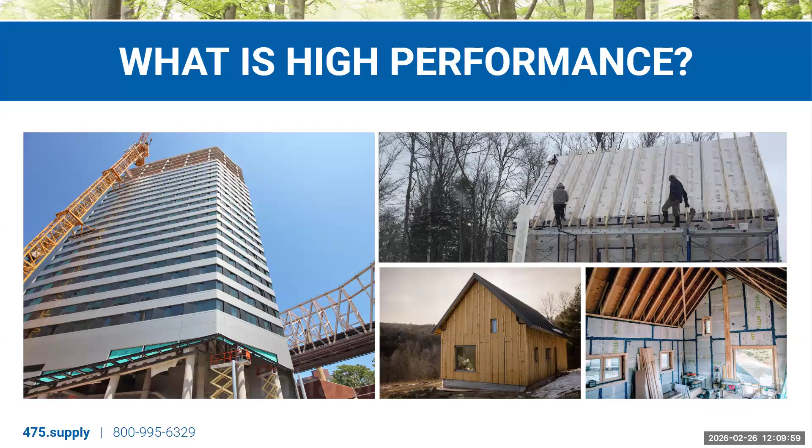The one that is probably most commonly associated is energy efficiency. When we optimize the enclosure, we minimize heat transfer. And when we minimize heat transfer, we can reduce our heating and cooling demand significantly and thereby reduce the carbon footprint of our buildings.

What also comes along with a high performance building and enclosure is excellent or exceptional comfort. When we have continuous insulation and airtightness, we reduce drafts, we reduce cold spots, and for that reason these buildings are consistently heated and very comfortable.

In addition, these buildings are very healthy, particularly because they're airtight and they don't allow airflow through the enclosure, so any air they bring in can be carefully filtered.

In addition, high performance buildings we expect to have continuous heat recovery ventilation, and so they're constantly exhausting stale air. So very high indoor air quality and generally supporting good health.

These buildings are very resilient in that they excellently manage air, water, vapor, and thermal control. They provide excellent protection for the structure and the control layers, and so there's less need to maintain or repair those elements over time.

This one may be a little controversial: affordable. We like to think that high performance buildings can be affordable, particularly airtightness, which is the most effective way to reduce heating demands in the buildings that we design. It can be implemented in most projects for a relatively low additional cost.

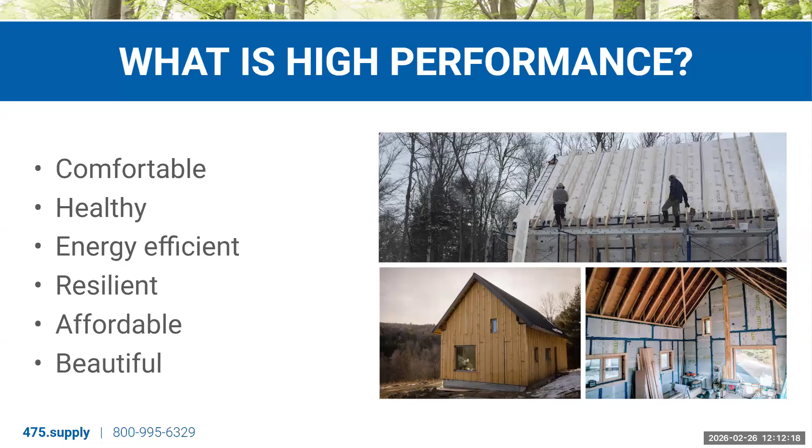So first, looking at the robust enclosure, again, this is somewhat fundamental, so just bear with me as I build the foundation, and then from there we can look at some more specific and interesting concepts. But first, talking about the robust enclosure.

So we talk about a robust enclosure, we talk about an enclosure that mitigates heat transfer, heat gains, and heat losses. We want to reach a point in our building where our energy is balanced, meaning that our total heat gains are roughly equal to our total heat losses.

Generally speaking, in most climates, particularly in Connecticut and where I am in New York, our total heat losses in the winter are going to exceed our total heat gains, and that's why we have mechanically generated heat to supplement our heat gains, which otherwise come from the sun or from internal gains, such as our body heat or machinery, computers, electronics in our buildings. But generally we're trying to reach this point where total heat gains equals total heat losses.

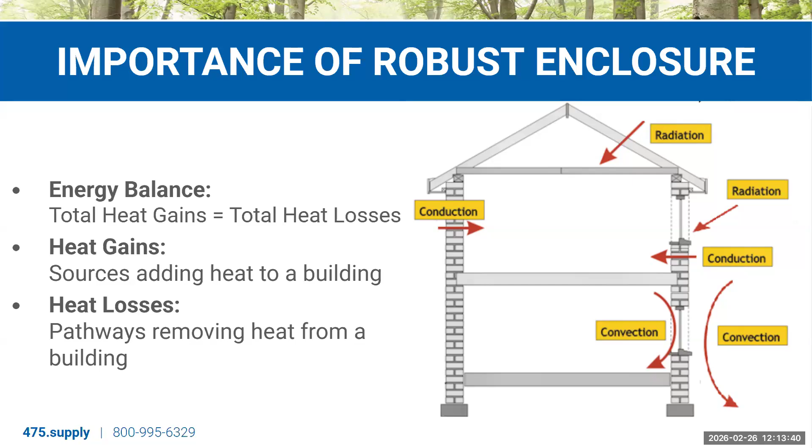And if we're mitigating heat gains and heat losses by creating excellent airtightness and insulation in our enclosure, then that becomes much easier. So what does a robust enclosure look like?

We at 475 like to reference Joe Lstiburek's perfect wall, which you guys might be familiar with, shown here on the left - a conceptual diagram of what every element of our enclosure should provide, shown as a wall on the left, and then on the right shown as a slab or a roof.

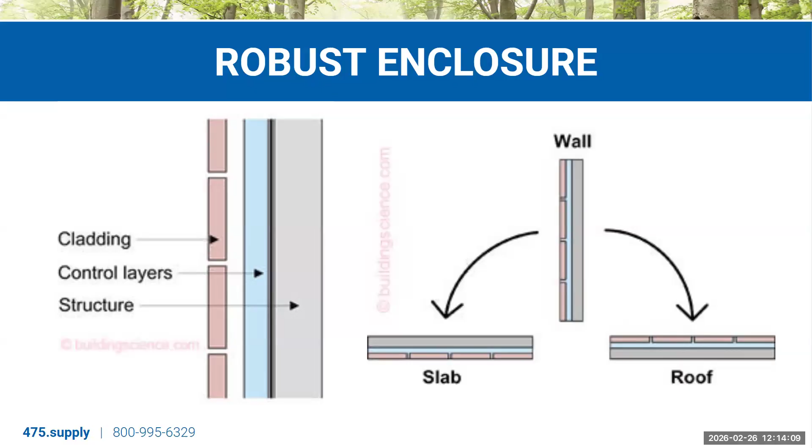Essentially, the three main categories of the perfect wall are the exterior cladding, the interior structure, and also the control layers. Looking a little closer at those control layers, we can break them into four categories in order of importance. First, water control - the most important because if our buildings can't hold water, they're not doing their most fundamental job, and they really aren't going to be inhabitable or usable, particularly in the long term.

Secondly, we have air control. Air control, as I mentioned early on, has a disproportionate effect on energy usage, particularly for heating and cooling. So when we have high levels of air control, we are going to be reducing our heating and cooling demand most effectively. We'll also be eliminating cold spots and a lot of moisture movement. Air control really provides a lot of benefits, and that's why we have it listed second in order of importance.

Vapor control we're not going to talk about too much today, but vapor is airborne moisture that moves through our assembly, and how we manage that moisture and allow it, in our recommendation, to diffuse passively through our structure. Then thermal control - insulation - how we manage heat transfer via conduction or through the material itself.

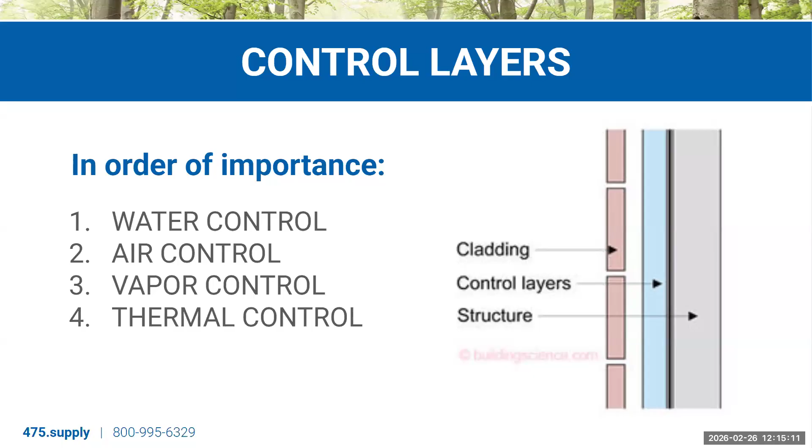So if we look at these control layers in practice, we might have a wall assembly such as what is shown on the right. A best practice design technique our company advocates for is that early in the design process, you go around the full enclosure and mark the water control layer in one color and the air control layer in another. Here we can see our water control on the interior face of our masonry, and our air control on the interior face of our insulation layer, just outboard of our interior finish.

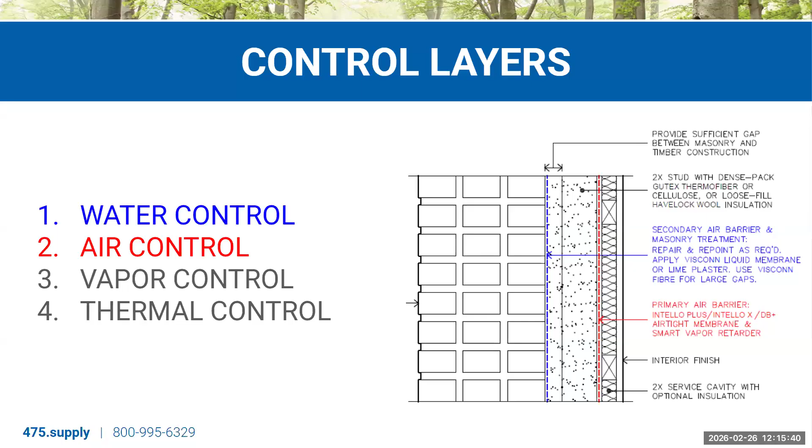These same techniques can be used when designing for air control and water control, and also thermal control in our fenestration. As mentioned, vapor control isn't discussed much today because generally fenestration is vapor tight - we don't really have to consider how vapor moves through our windows, doors, and skylights. However, we do need to consider how our windows, doors, and skylights control air and water, as well as provide thermal continuity, and how we integrate or ensure continuity between water, air, and thermal control in our fenestration to the surrounding enclosure.

And I guess just to back up a little bit, one thing that's really unique about skylights, windows, etc. is that they're really one of the only elements or components in our enclosure that's going to be providing all of our control layers.

So in this case, our window is expected to be airtight, providing air control. It's also expected to be watertight, providing water control. And in a high performance building, it's expected to be thermally continuous or provide exceptionally low U values, so it'll also be providing thermal control over the penetration it's installed within.

So it's really critical that when designing for high performance fenestration at a penetration, we consider how we'll be connecting the air, water, and thermal control in the enclosure to the fenestration element, which is then providing those control layers over the penetration. So for a window, this is a section drawing of one method we can use to achieve continuity of our control layers.

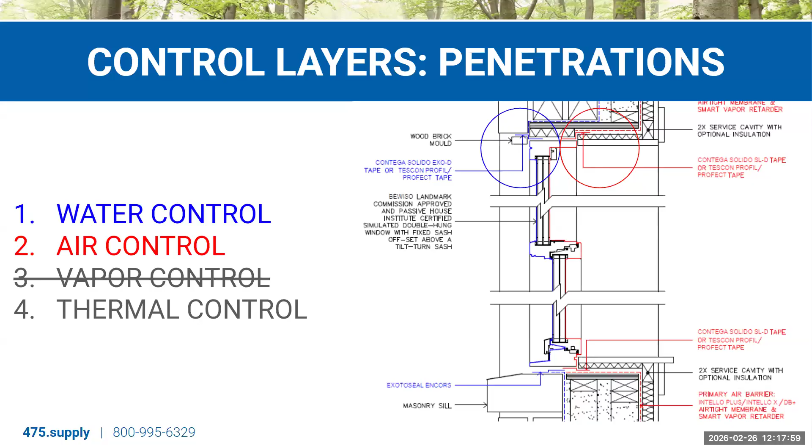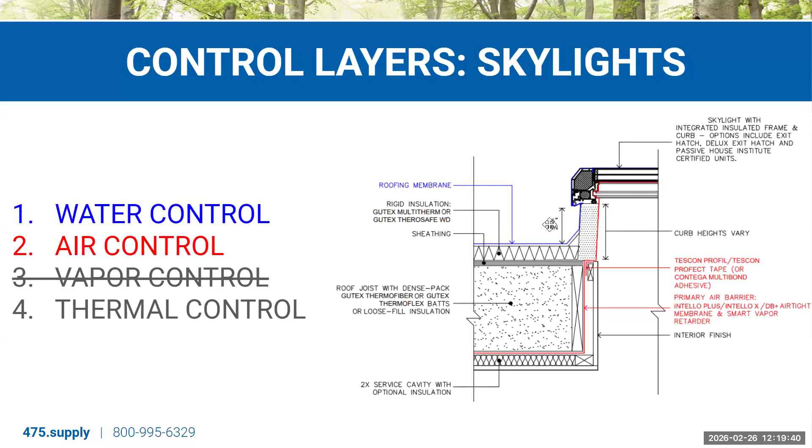So I want to talk a little bit about designing for thermal control specifically now. Before I do, are there any questions?

I don't see any. Cool. Let's keep it rolling then.

So how do you optimize thermal control around window, door, and specifically skylight penetrations? Let's talk first about some product considerations for designing for thermal control.

The first one is thermal values. We need to ensure we're specifying and installing skylight assemblies that are thermally continuous. This means not only a low UG value and ideally triple layer glazing, but also a low U value for the frame, a thermally broken or continuously insulated frame, and what we call a warm edge spacer, an insulating element between the glass panes that prevents heat transfer or thermal bridging between the frame and the glass.

These U values of each component can be combined as a weighted average to get a U value for the full assembly, and that's really the U value we want to be considering when selecting a skylight.

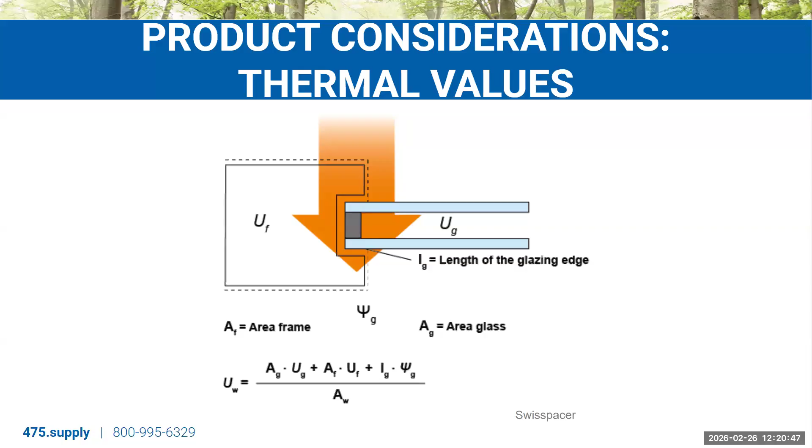So what would a thermally continuous skylight look like in practice? We saw a section drawing of one previously. Here we see a rendering of a very similar assembly.

Again, we have triple layer insulated glazing and the warm edge spacer I mentioned. In this case it's Super Spacer, a brand of warm edge spacer with exceptionally low psi values, or linear thermal transmittance.

We have an aluminum frame that has been continuously insulated, so there's not really any conductive materials penetrating the insulation layer, and we can assume minimal heat transfer at that location. Again, this skylight has been prefabricated on an insulated curb with a foam insulation core, ensuring the skylight is integrated thermally with the surrounding roof structure and its insulation.

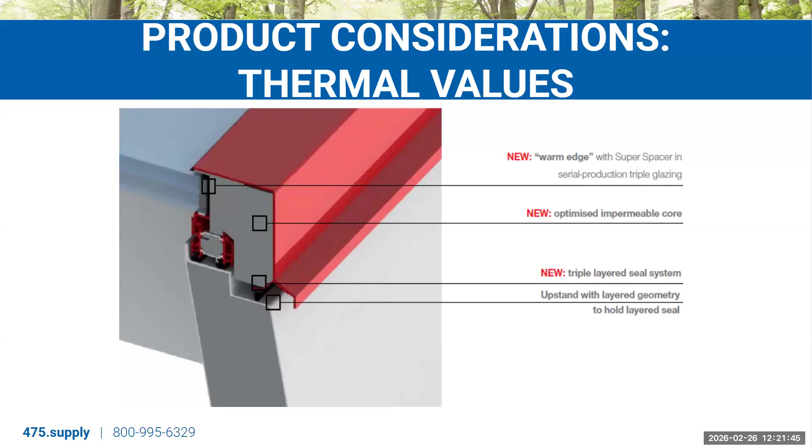So what would a skylight assembly that is not thermally broken look like? It might look something like this assembly we see on the left.

This is a thermal model, so we can see these isotherms in different colors, each representing a different temperature range within the skylight assembly. Our warm temperature is shown on the inside in warmer colors, typically red, orange, yellow. Our cooler temperature is shown on the outside in purple and blue.

As we move through our skylight assembly from curb to skylight, there is a significant thermal bridge at this location where it looks like we have a conductive material, maybe aluminum or some sort of metal, penetrating the full assembly from interior to exterior. We can see that this green isotherm is bleeding through the entire assembly, and we're going to have significant heat transfer for that reason at this location.

This is a really big problem for skylights because when we see thermal bridging to this extent, we'll have in the winter months very cold interior surfaces as our warm interior air is transferred outward through this conductive thermal bridge.

And when we have cold interior surface temperatures due to thermal bridging, we can see condensation occur, particularly in the winter as we have very warm, moist interior air spending a lot of time indoors, showering, cooking, cleaning, breathing. That warm, moist interior air will rise into our skylight opening, come into contact with the cold interior surface created by thermal bridging, and then condense and in some cases drip down into the interior. Often perceived as a leak, but more often condensation.

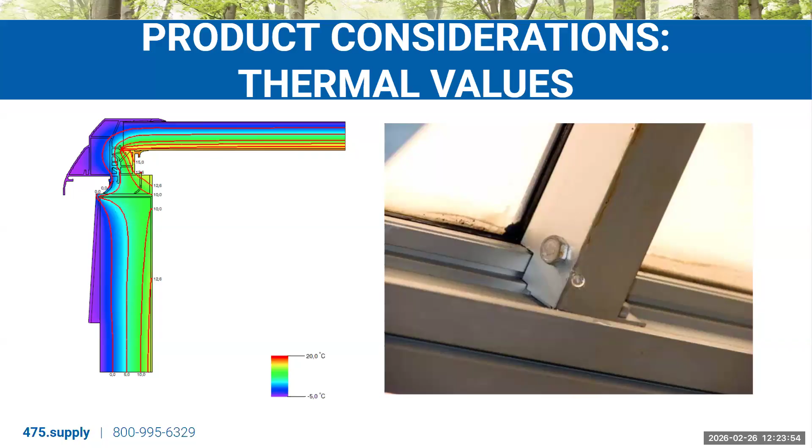Now we'll look at some design considerations for designing for thermal control. The main principle when designing for thermal continuity between a skylight and a surrounding roof assembly is that we want to align the thermally continuous fenestration or skylight with the thermal control layer in the roof. We saw this previously when we had our insulated curb embedded in the exterior insulation of the roof. We had the insulation thermal control layer in alignment with the thermally continuous skylight.

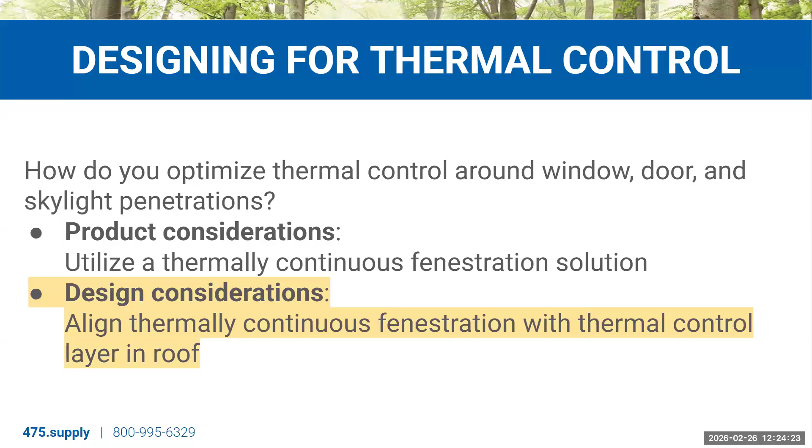The same principle applies to windows. I think it's a little bit easier to demonstrate at first how thermal control is achieved in a window. In this case, we're going to make a couple of assumptions in this wall section with a window penetration: one, that the window is thermally continuous, minimizing heat transfer through its assembly, and that the thermal control layer in the wall assembly is centered.

So ideally, to design for thermal continuity, we want to ensure that our window is installed in alignment with the insulation in our wall assembly, which, as we said, is centered. In the thermal models we see here on the left and the right, we can see that our window is installed at the exterior and the interior respectively of the wall penetration, and so we're out of alignment with the insulation in the wall.

For this reason, we will see heat transfer bypass our thermal control layer as it moves between the window assembly and the wall insulation. Again, we could see issues with particularly cold surface temperatures at the interior corners of our window, which could create cold spots or discomfort, as well as potentially condensation.

In this center image, we've aligned the window with the thermal control in the wall, and so we've really mostly eliminated any thermal bridging that is occurring around the window or through the wall. That's indicated here by the fact that our interior surface temperatures, shown in the red isotherm, are relatively continuous. We don't see any bridging or kinking of colors, any colors that bleed through the assembly. Our cold temps are maintained at the exterior, and our warm temps are maintained at the interior because we have a thermally continuous window aligned with insulation in our wall assembly.

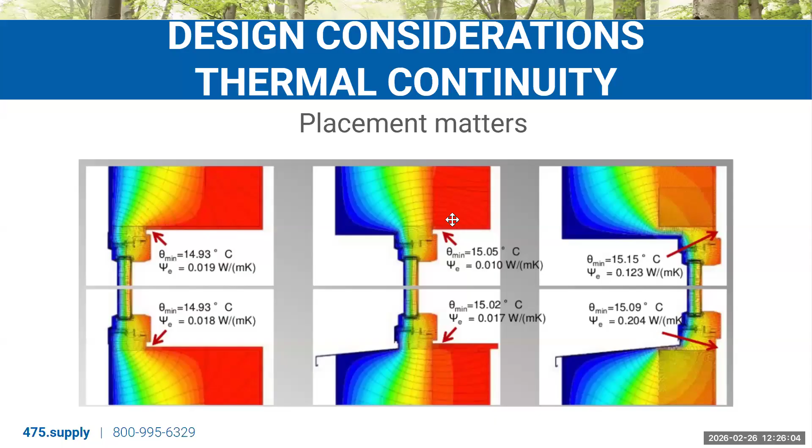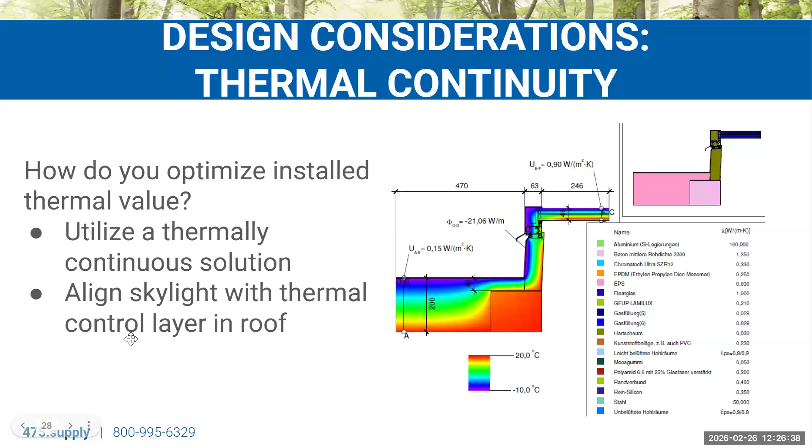Same principle applies to skylights. Here we have a thermal model of the skylight assembly we looked at previously. In this case, we have the insulated curb we discussed. When we embed that insulated curb in the exterior roof insulation, we get really nice isotherms without thermal bridging between the skylight and the roof assembly. We've taken care of the two main principles: the product consideration of utilizing a thermally continuous skylight solution, and the design consideration of aligning that skylight with the thermal control layer in the roof.

When we consider thermal control, we know it's important because of energy efficiency, but it's also a comfort driver. We talked earlier about high performance buildings and how comfort is one of the main expectations we have of them. We discussed the product consideration for utilizing skylights in high performance buildings being a thermally continuous solution. This is an example of why that's so critical.

What happened here is that these windows don't meet the basic principles for a thermally continuous solution that we looked at previously. So we're seeing a significant amount of heat transfer in these summer conditions from the exterior to the interior. When that occurs, the interior surfaces of these windows and skylights become very warm. Because we have much warmer surface temperatures than air temperatures, that heat will radiate inward and make it feel like a radiator was on. A very simple solution would be utilizing a solution that eliminates or significantly reduces that heat transfer, so our interior surface temperatures are more in alignment with our interior air temperatures.

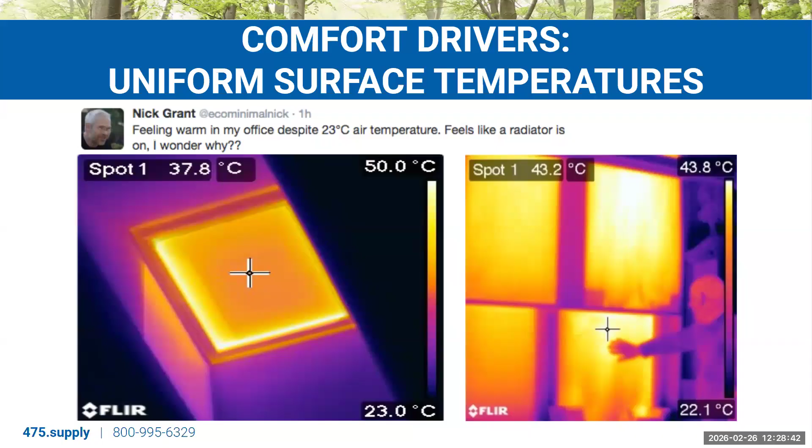As our warm conditioned air circulates and comes into contact with those cold interior surface temperatures, it'll cool and sink, leaving behind a vacuum where more warm air is pulled in, cools, and sinks. We'll have this thermal circulation or convective looping that can often feel like a draft, but is actually just due to poor U values in our fenestration.

If you live in an older, maybe mid-century apartment building, you'll often see radiators installed underneath the windows, which is really one design tool for eliminating this convective looping and ensuring the interior surface temperatures stay warm by heating them mechanically.

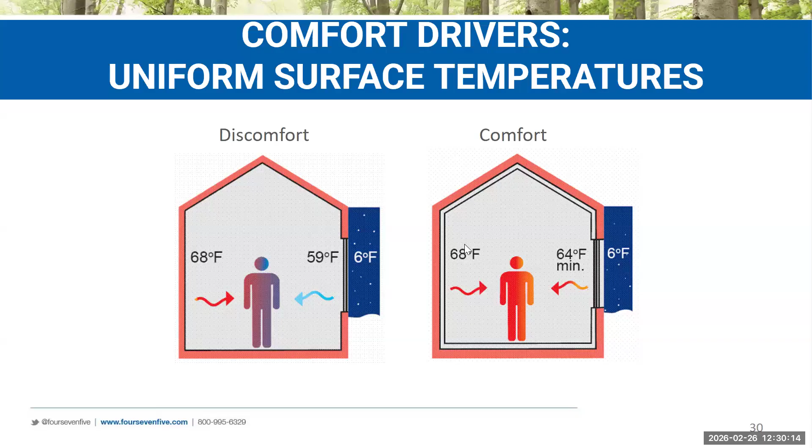Obviously, this is not a high performance solution to a problem that can be addressed by simply improving the thermal performance of our enclosure and windows, as shown here on the right. We've upgraded our window, reduced the heat transfer through our window and walls, and for that reason our interior surface temperatures are much more in alignment with our interior air temperatures, and we won't see that convective looping occurring.

So we've talked about the robust enclosure. I want to talk a little bit about quality daylighting. Then we'll get into an energy balance example. And then if we have time at the end, I'll talk a little bit about some of the products that our company supplies. Before I get into quality daylighting as a component of high performance building, are there any questions?

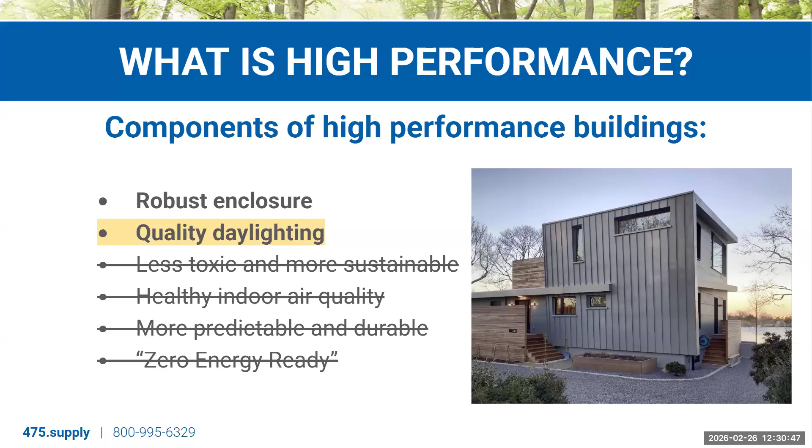No, I don't see any. Carry on. Cool, must be doing a great job explaining things. You sure are. Yeah, all right, so let's look at quality daylighting.

So what is quality daylighting? What are some of the principles that are important, or that we consider as a company critical to ensuring that our daylight is quality? Well, the first is a balanced window to wall ratio. An important thing to keep in mind as building and design professionals is that fenestration - windows, doors, and skylights - is really always going to have a worse insulating value than the surrounding opaque structure. So our U value in our windows, doors, and skylights is generally almost always going to be higher than our walls and our roofs. So we don't want to have too much glazing.

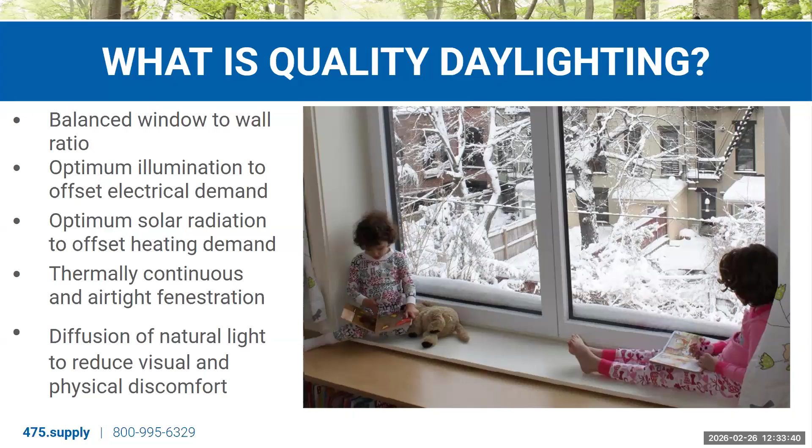Some of the benefits of quality daylighting: improved health and productivity. When we have access to natural light regularly, it reinforces our circadian rhythm. It helps us sleep better at night, keeps us energized during the day. It's been shown that students that have access to natural light perform better on tests. Shoppers with access to natural light in retail locations spend more time in store. Natural light also provides the full spectrum of visible light, and so it's the best way to accurately display colors, materials, or in the case of commercial buildings, maybe foods. So there are definitely aesthetic benefits there for quality daylighting as well.

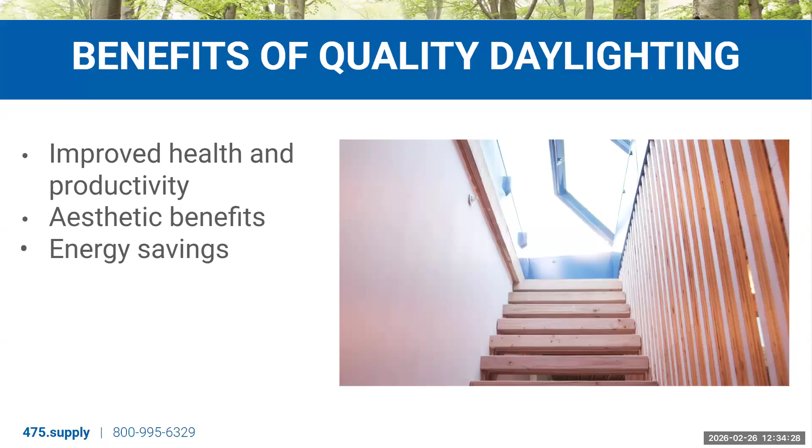Energy savings, which I'll get into in a little bit. But basically, when we have quality daylighting, we're utilizing radiation effectively. We can use that radiation to offset our heating demand in the heating season in the winter, which is particularly important in heating dominated climates such as ours. It also allows us to reduce our electrical loads, as when we get radiation from the sun, we also get illumination.

Skylights are particularly well suited to provide natural ventilation because of their position on the roof. Particularly in taller buildings, they're well suited to take advantage of the stack effect, or the tendency of warm air to rise through buildings, looking for an escape through the roof or ceiling. They can also be used for nighttime flushing in shoulder seasons, allowing warm air held by the building to ventilate outward during the evenings.

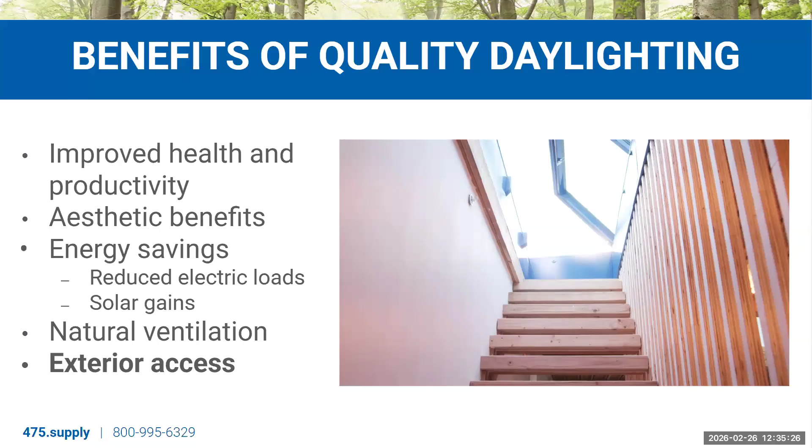Exterior access is particularly relevant in urban climates such as Brooklyn, where I am located. Skylights that open, such as the one shown here on the right at 475's office in Brooklyn, to a roof deck can allow us to access exterior environments in ways that might otherwise not be possible, and help us get more out of our buildings than they could previously offer.

So, importance of quality daylighting. I'm going to get into an energy balance example in a few slides, so I want to clarify how windows, doors, skylights, and fenestration affect energy balance and can provide energy savings as a benefit. We talked about convection, air transfer, and conduction, heat transfer through material, and how we can manage that in a skylight assembly and installation.

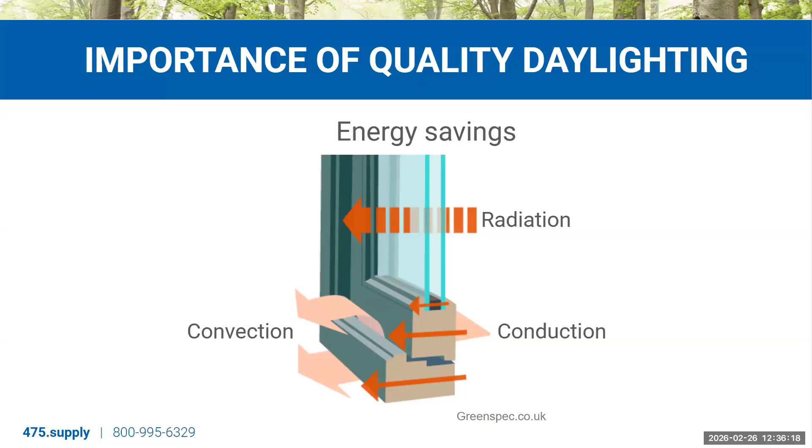Now we're going to talk a little about radiation. In a high performance building, we want our fenestration to provide more energy via radiation during the heating season than we are losing via convection and conduction. If we achieve that balance—more radiative heat gain than convective and conductive heat loss—we can actually get free heat, so to speak, from the sun, which we can use to offset our heating demand. More on that in a bit.

For now, I want to talk about the relationship between windows and skylights. Because skylights are oriented towards the sky, they capture much more light and heat than windows can. For this reason, they can easily be 3 to 10 times smaller than windows, depending on orientation, while still collecting similar amounts of light.

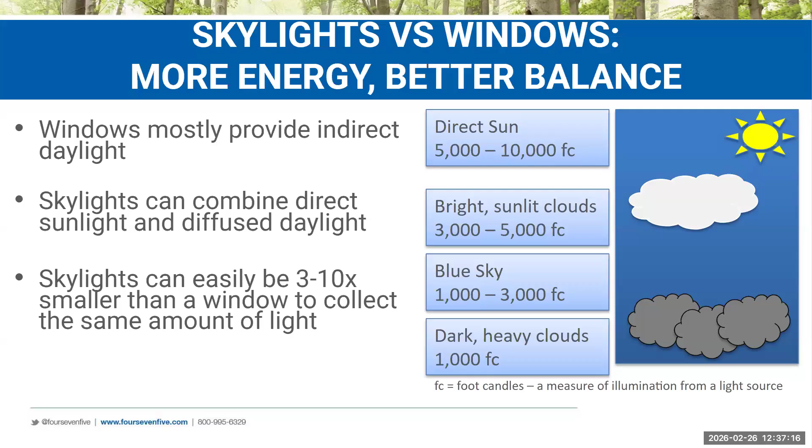Let's talk about how we can design for solar control. First, via product considerations—in this case, utilizing glass types that allow appropriate amounts of light and heat into the interior, depending on what we need for our climate and building.

This is a fundamental concept, but there are a couple of different ways we measure light, or the amount of light a window lets in. There's visual transmittance, a measurement of how much visible light or illumination we receive through a glass surface. Then there's solar heat gain coefficient, measuring how much radiation or solar heat from the sun we receive through that same surface.

Generally, for a high performance fenestration or skylight assembly, we want to consider the visual transmittance to solar heat gain ratio, and ensure as much as possible that ratio is right around 2. When it's around 2, we can be relatively confident that window has a low-E coating, and that it will reduce solar heat gain while still providing excellent levels of illumination.

In a heating climate, it's important to consider that in general, we want to use visual transmittance and solar heat gain positively—receiving as much light and heat as we can comfortably allow, using transparent glazing combined with orientation considerations as well as shading solutions, so we can get that heat and light when we want it, and block it in the summer when we don't.

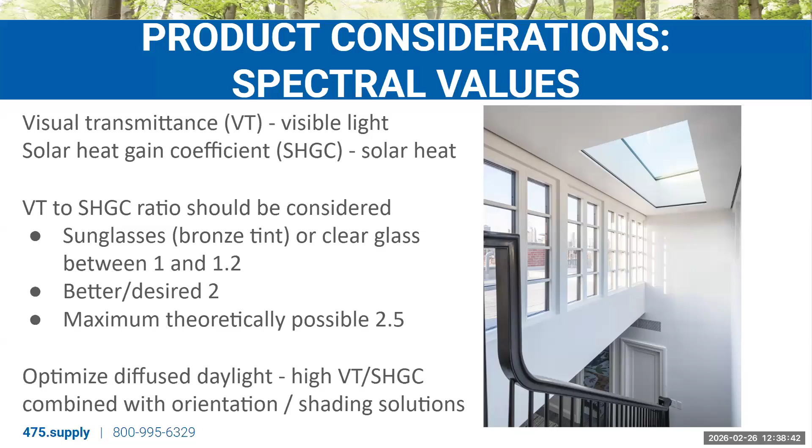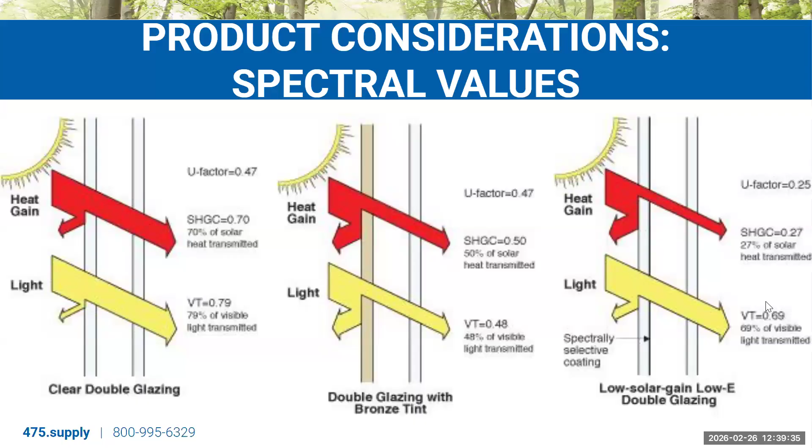Ideal for comfort and energy efficiency is a low emissivity coating, like shown in the image on the right, which allows light and visual transmittance to stay at high levels while reducing solar heat gain, giving us a ratio closer to 2.

Because we have both a heating and cooling season in our climate, we need to consider shading or diffusion of light. Ideally, in a high performance building, we utilize shading and diffusion at the exterior of our skylights, ensuring we block heat before it ever enters the conditioned space. But interior shading is still well suited to prevent visual discomfort, i.e. glare, and can be effective compared to not using fenestration or shading at all.

Some shading options include interior or exterior motorized blinds, which are ideal because we can open and close them depending on conditions. We can also consider glazing prints or treatments, like fritted glass, which reduces light and heat by a consistent amount throughout the year and provides a different quality of daylight—more of a dappled effect—which could be preferable from a design perspective.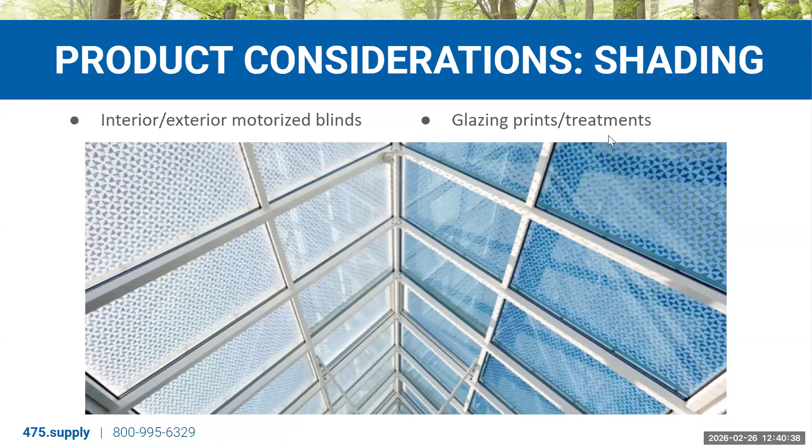Let's look at some design considerations for designing for solar control. The main consideration to keep in mind is orientation—nothing, no rocket science here.

We want to consider the orientation of our building, how we're orienting it on the lot, and where we're locating our windows in relation to where the sun will be at any given time of year, keeping in mind the sun is higher on the horizon in summer, lower in winter, and always in the southern horizon.

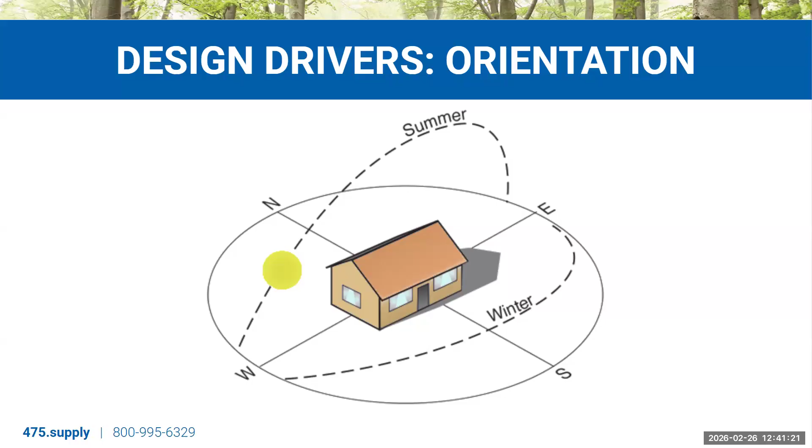In the northern hemisphere where we're located, we can also thoughtfully design fixed shading elements that block light and heat in the summer while allowing that same light and heat to enter when the sun is lower in the winter.

When we manage solar control effectively, we reduce glare and overheating, which, similar to thermal asymmetry, is a comfort driver and will improve the comfort of our high performance buildings.

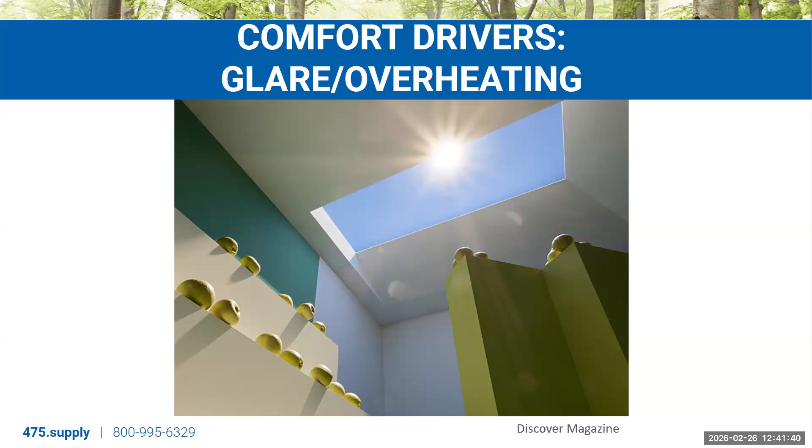I want to get towards the end of our presentation now. I'll go through an energy balance example and briefly demonstrate how skylights can reduce heating demands in the winter if used effectively. Before I get into this exercise, are there any questions?

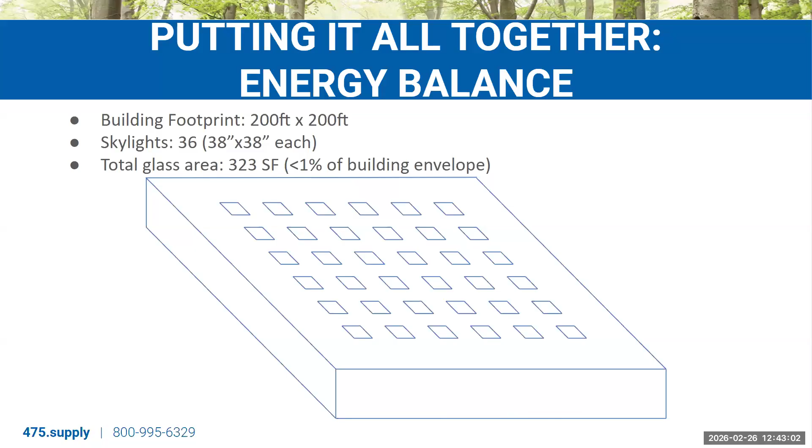In this example, we'll look at how these skylights specifically affect our heating demands in the winter, and then how they'll affect our cooling demands in the summer, and how we can change the impact these skylights have on heating and cooling demand by changing the attributes we've discussed in today's presentation.

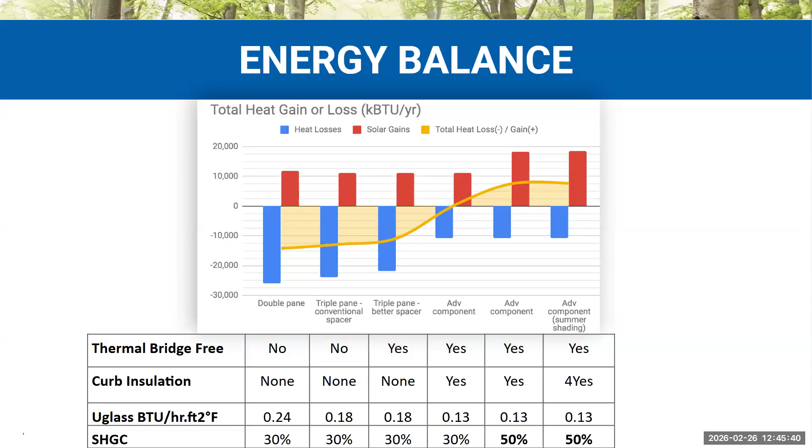Our next step is that in these last two columns, we can increase our solar heat gain coefficient to 50% from 30%, while maintaining a high performance, thermally broken assembly and a low UG value. In doing so, we'll maintain exceptionally low heat losses through our skylights while increasing our solar gains to a point where they are greater than our heat losses, getting what we call free heat from the sun, which we can use to offset our mechanical heating demand.

So again, looking through our different columns here, this is the same example. That is how skylights can provide the benefit of energy savings in a building when they are selected thoughtfully and designed for with consideration.

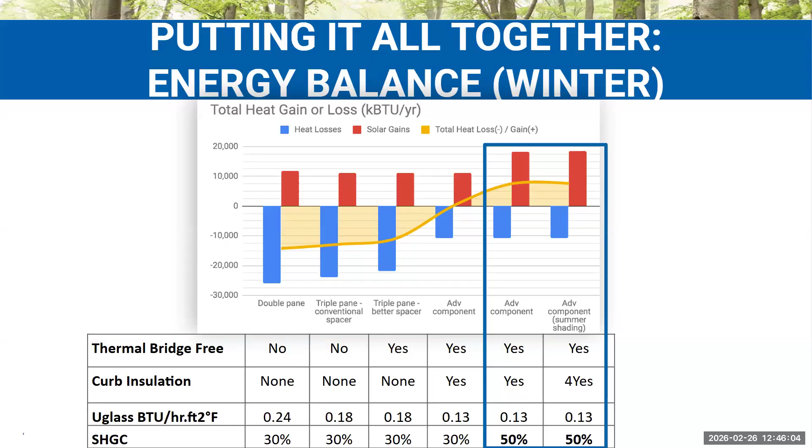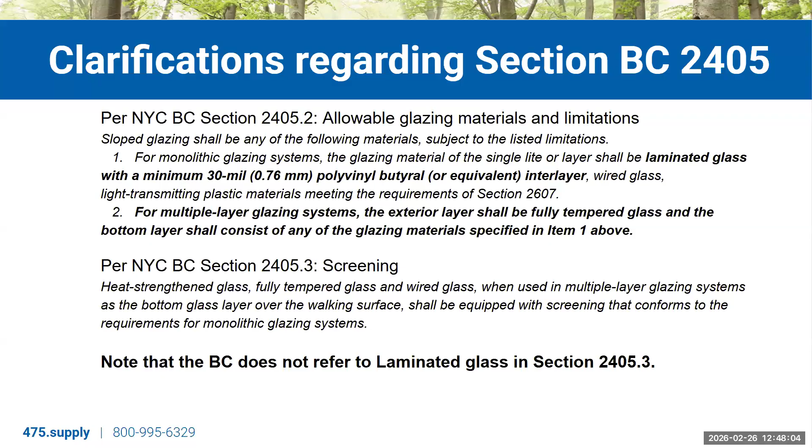So we're kind of dealing with some ambiguity and just lending our understanding to what we've seen in the industry.

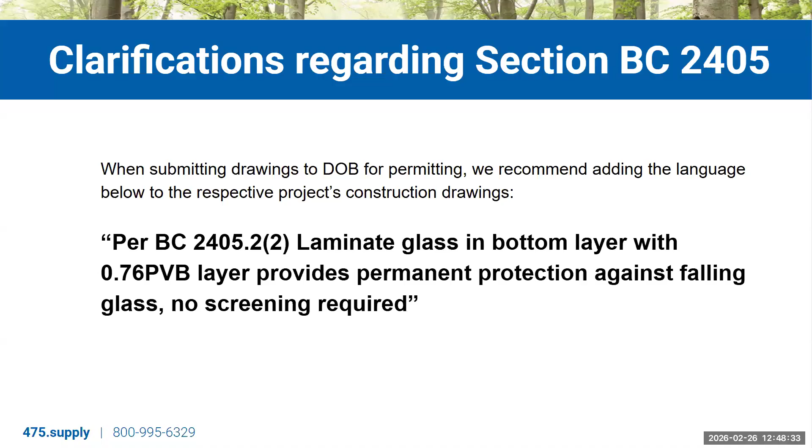So when submitting drawings to the Department of Buildings for permitting, when including skylights, we recommend including language such as this in the respective construction drawings: laminate glass in bottom layer with PVB interlayer provides permanent protection against falling glass, no screening required. In our experience, that has been sufficient to avoid conflicts with the code and to ensure that no interior screening is going to obstruct or block light and heat from our carefully selected skylights.

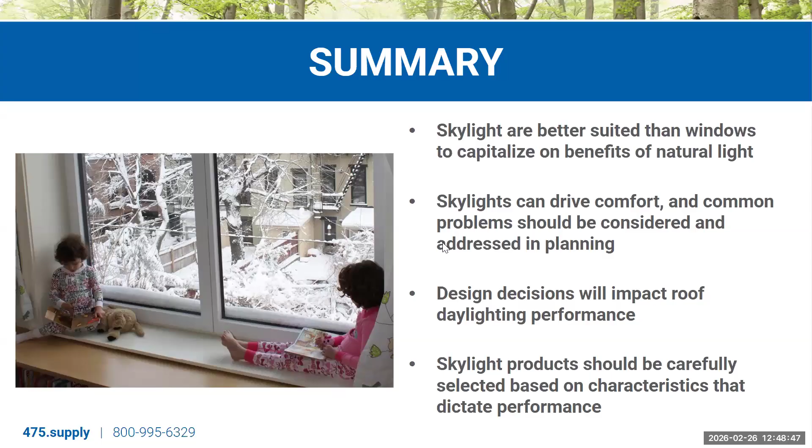So that brings me to the end of the presentation. We leave you with the same image that we looked at earlier on, an excellent example of quality daylighting. Happy to open it up to any questions or to talk about some of the products that our company offers if that might be of interest as well.

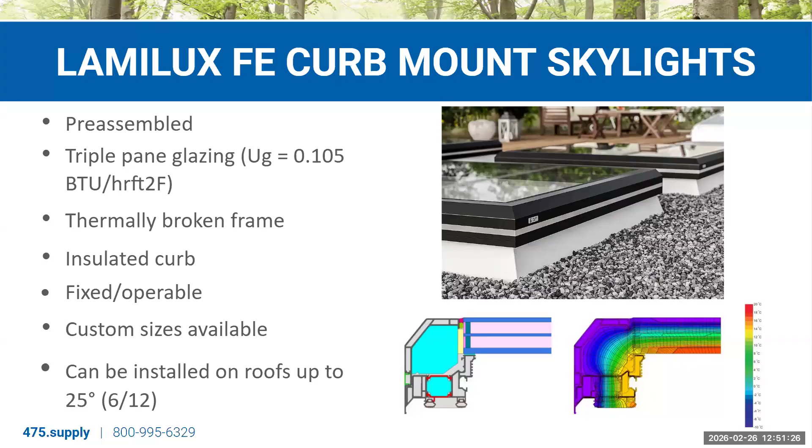Someone else asked that they're interested in commercial skylights - does 475 have only residential or both? No, that's a great question. Our skylights, particularly the Lamilux units, are really well suited for commercial buildings. We definitely see a lot of interest in those skylights, specifically the Lamilux FE, which we showed a few times in our presentation - aluminum frame with the insulated curb we discussed, thermally continuous assembly. The FE circular, which has a very similar assembly but in a circular geometry, we find is really well suited or often requested for commercial and institutional jobs.

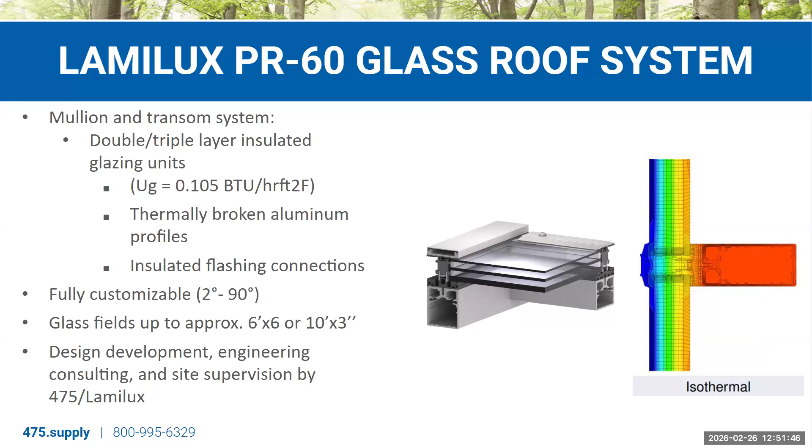And then the Lamilux PR60, our glass roof system, which is more customizable, sort of a curtain wall or knockdown system for the roof. This system is often used on larger glass roof spans, things you might see over a multifamily building, a hotel, college building, that sort of thing. And it can be provided in a lot of different geometries as well to accommodate different designs.

Great, lots of variety there. Yeah, the system particularly - I really like the round one, the bow roof. That's neat. I like that one as well. Haven't done one of those yet.

Someone has asked, can a skylight satisfy emergency egress requirements? Yes, the skylight can satisfy emergency egress requirements. Generally those requirements are based on the length and the width of the opening, as well as the clear area within that opening. So as long as the skylight meets those requirements, it can be used for an egress window per code.

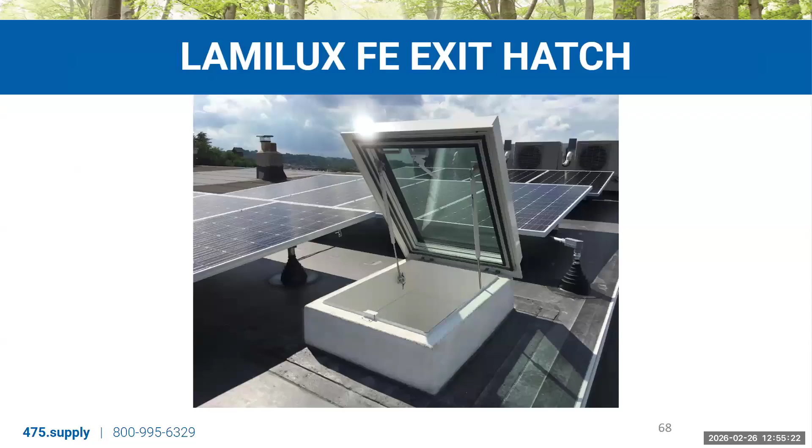Another question—does 475 supply any kind of solar tube anymore? What is the common choice among your customers for residential applications? No, unfortunately we don't provide solar tubes anymore. The closest thing we can offer is the circular skylights I mentioned previously, which can serve a similar purpose but aren't quite offering the same utility as a tube.

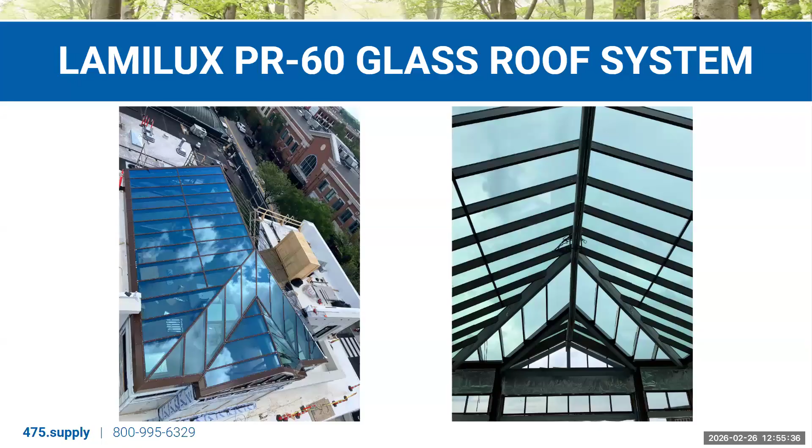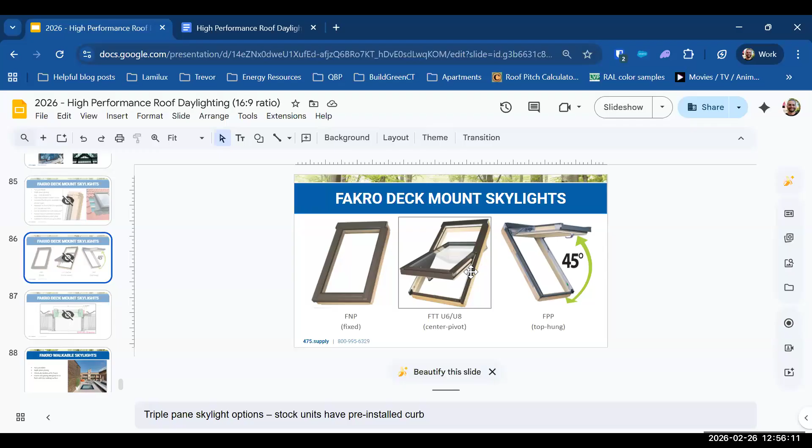So it's Fakro and Lamilux—those are the two manufacturers we work with. Yeah, Lamilux out of Germany and Fakro out of Poland.

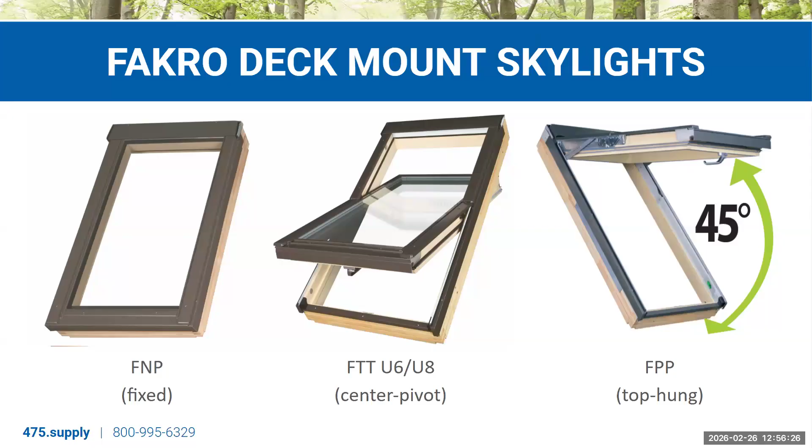How about lead times and logistics of getting them? We do stock some of the Lamilux and some of the Fakro skylights at our warehouses in New Jersey and Connecticut, respectively, so those are available with shorter lead times of a few days to a week. Otherwise, the Fakro skylights as a special order require a lead time of 10 to 12 weeks, and the Lamilux skylights as a special order require about 15 weeks. So something to plan for.

So you just zipped through a bunch of fun photos of projects—can you show those off? Fortunately... hang on one second, just having some technical difficulties.

Uh-oh, now we can't hear you at all. No apologies, no worries. Hey man, we've all been there—you're doing a good job. I'm plugged in, I'm just not charging, so my computer is going into hibernation mode now. But I'd be happy to follow up with some of those project examples at a later date. Okay, sure. That'll do.

Well, maybe that's technology suggesting this is a good time to wrap up.